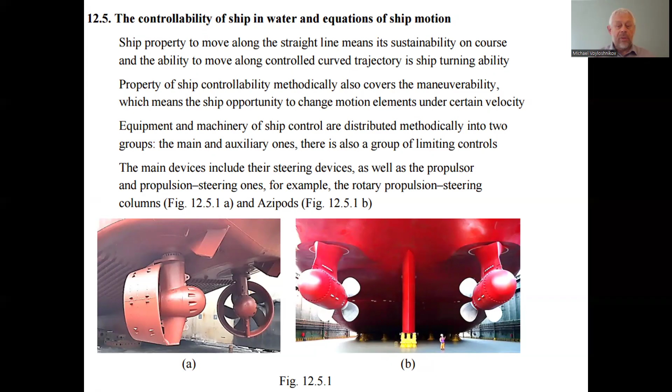When you consider the motion of ship on still water, we can describe this by a system of equations in three projections, considering the necessary assumptions. So we just consider the ship motion on the surface of the water. Three equations correspond to the degrees of the ship freedom on the surface of the ocean. The first equation corresponds to the total forces acting on ship projected on the longitudinal direction, the abscissa of the initial coordinate system associated with the ship.

We have a Cartesian coordinate system associated with the ship to do the calculus of ship controllability. We have here the characteristic of the ship inertia. In the first brackets, uppercase delta is the displacement of ship. Mu with the index 1,1 is the added mass of ship when it moves with acceleration along the abscissa axis.

The abscissa axis we usually indicate as x, ordinate y and applicate z, but for the coordinate system associated with the ship, we can indicate them by Greek lowercase letters like xi, eta, and chi, for example. Okay, return to the equation.

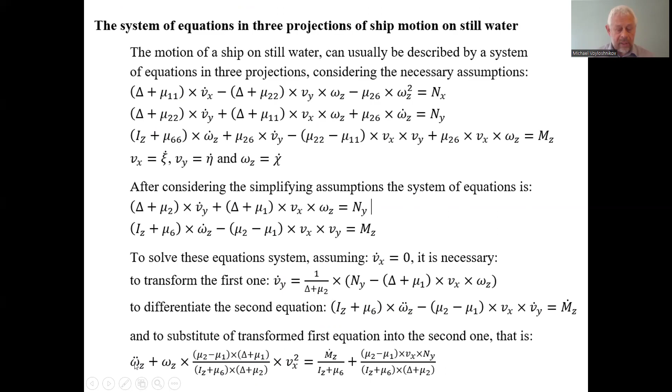I'm sorry. Here we have to consider the first derivative. The first derivative, exactly, yes. Sorry for the error in the description of this formula. The acceleration is the first derivative of the angular velocity. Oh, no. We have the second derivative as well. Yeah, excuse me, the second derivative. Yeah, this is correct. I just doubted a little bit whether the second derivative is correct. This is not angular acceleration. This is the second derivative of the angular velocity. Yes, and

between the angular velocity for continuous motion of the ship and angular acceleration, it is usual to consider the factor p from the solution of the characteristic equation. This characteristic is correctly found, yes, no errors. I just doubted a little bit and returned to consider. Am I right or not?

And besides, to find the characteristic root of the second order linear homogeneous differential equation, we will use the empiric formulas. Originally, we did it in article number 12.2 in more detail, but the moment of inertia of the ship rotation around the applicate axis, the self moment of the ship, not the added mass moment, has to be approximately equal to the moment of inertia of ship rotation around the ordinate axis, and we can use the empirical formula that depends on the general completeness, the completeness of the waterline area, the ship displacement and the squared length of the ship waterline.

Otherwise, just substitute. We got that the moment of inertia of ship rotation with acceleration around the applicate axis will be equal to 7,122,631 ton by square meter.

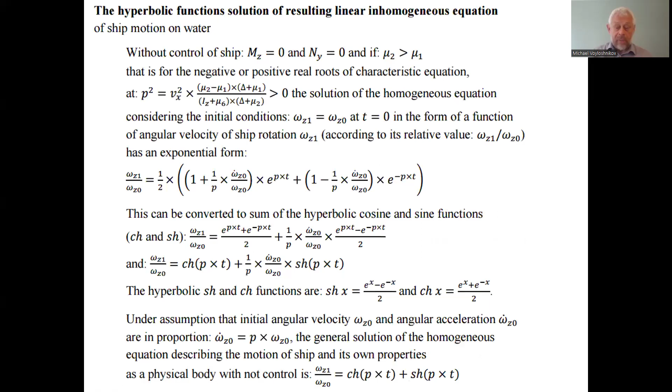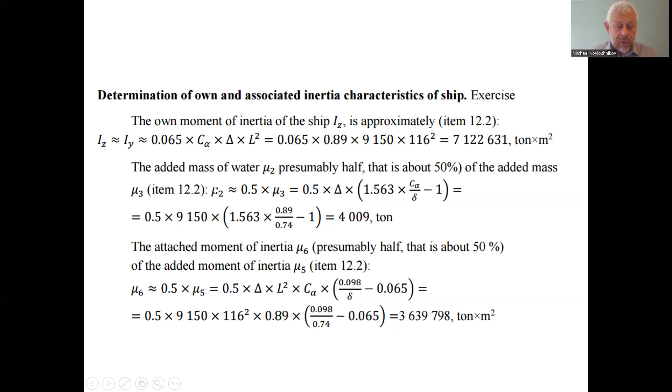And for the definite range, we assume the added mass mu2, which we got by the empirical formula of the water impact on ship inertia when it moves with acceleration along the ordinate axis, so transversely. For the transverse acceleration, the extra inertia of the ship, like the side impact of the water on the ship. And having mu2 and considering the range of variation of this fraction, we can find what mu1 has to be.

So mu1, the added water characteristic of the inertia of the ship when it moves with acceleration along the abscissa associated with the ship Cartesian coordinate system, inertial. So the system in which we consider the accelerations and the velocities, and with acceleration we consider the inertial systems moving with the ship. The Cartesian system associated with the ship moves with the ship with the same acceleration as the ship moves, but in this inertial coordinate system we consider the acceleration available in this system.

So the acceleration of the ship does not depend on whether it is the coordinate system associated with the ship or this fixed coordinate system within which the ship moves. All systems are inertial, so with the definition of the accelerations.

And having got the added mass when the ship moves along the transverse axis with acceleration, got by the empirical formula I did explain here for the ship when it assigns three particulars, and considering the range of the variation of this fraction, the proportion of two added masses of water, we got the range of the variation of the first one.

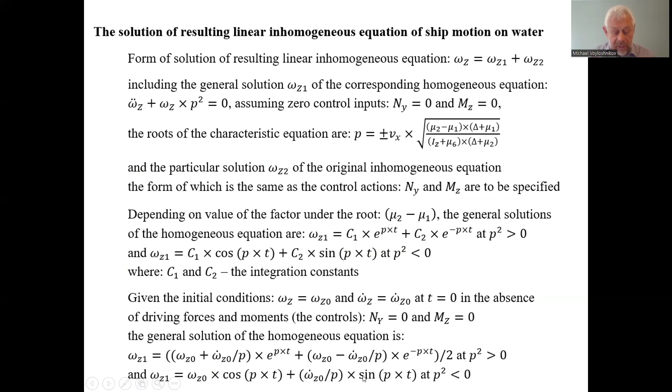It depends on, and this is the set of diagrams for imaginary roots of the differential homogeneous equation of second order. This we have for the proportion when mu1, the inertial characteristic from water onto ship, is proportional to mu2, the impact of water on the ship inertial characteristic moving transversely with acceleration. If this mu1 is less than mu2, the fraction has to be less than 1. And in this case, the root of the characteristic equation will be real, and decisions will be of the exponential type.

And if the added mass will be more, in the considered range from 1 to 1.7, more than the impact of the water on inertia when the ship accelerates along the ordinate axis. If mu1 is more than mu2, we will have the imaginary roots p of the characteristic equation, and we will have the trigonometric decision of the linear homogeneous second order equation of the ship motion on the surface with no controls.

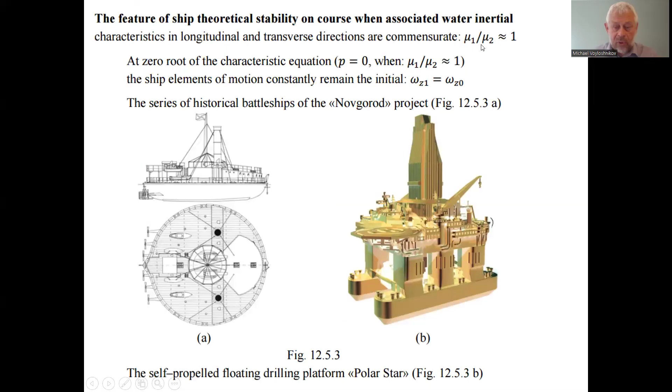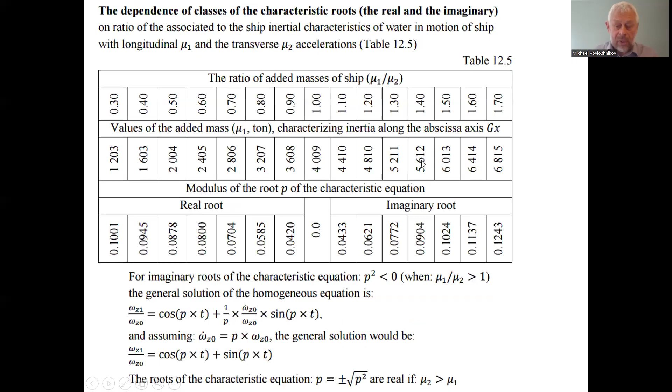When the added mass mu1 is more than or equal to mu2, the ship remains in self-oscillation moving in the same direction. For ships of usual shapes, when the ship length is much bigger than the breadth, the ship without control will lose the course and will move off the direction of the abscissa axis associated with the ship.

Consider the angle between the abscissa axis associated with the ship and the abscissa of the fixed Cartesian coordinate system. Originally they coincide, but if the ship changes course, an angle arises between the fixed coordinate system and the moving coordinate system associated with the ship. So it turns to either side, and after that it keeps moving in the same direction as originally for the initial conditions.

The possibility of this movement depends on the dissipation of energy: the motion of the ship attenuates, or perhaps it continues if the source of energy to keep the motion remains. In this case, turning transversely to the direction of motion, the ship will keep moving with self-oscillations. All this is without control, if we do not have a feedback system keeping the ship on a straight course.

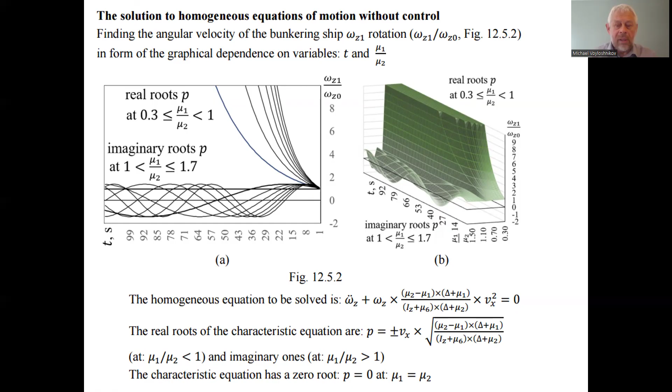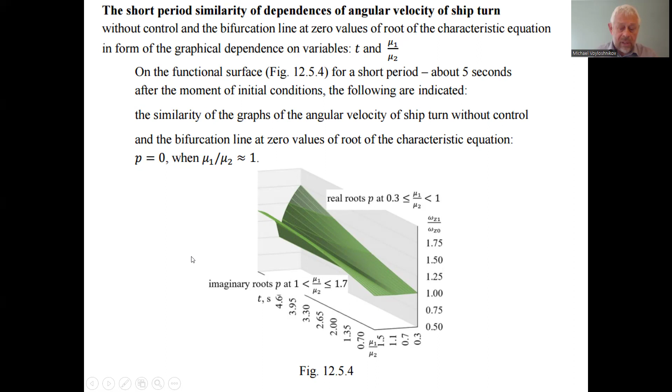So theoretically, the solutions of trigonometric type and of exponential type originally look the same, and the differences arise with time. Questions and comments. The seaworthy property of ship controllability covers its straight-line motion stability and its turning ability under the influence of the control system, and maneuverability, not related to the control system, is the ability of the physical ship to perform maneuvers at a certain velocity.

Ship controllability is one of the usually considered five ship seaworthiness properties, along with buoyancy, stability, the ship propulsion performance, and the ship unsinkability, if we consider this property of a partially damaged ship to retain the properties of buoyancy and stability.

So we have, along with the four indicated, the fifth seaworthiness property. Ship controllability is generally not only the performance of the ship with a feedback control system and with controls, but of the ship itself. The ship itself has definite properties due to its controllability.

12.5.2: elements of ship shape having an opposite effect on stability on course and on ship turning ability, when, for example, the ship motion stability on course improve by increasing the ratio of ship length to breadth, or installing fins in front of the rudders, at the same time they can proportionally worsen the ship turning ability.

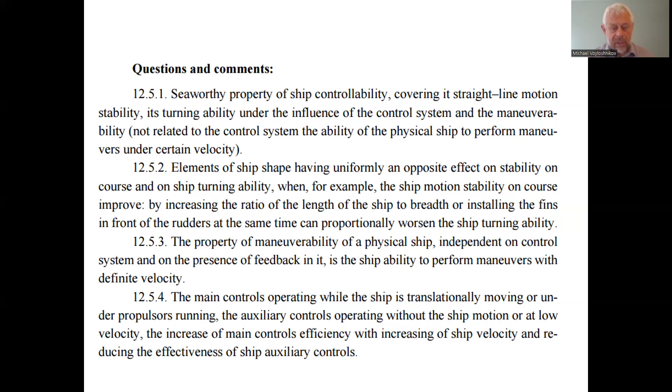12.5.5: types of steering devices of ships: rudders, multi-blade steering complexes, rotary steering devices, reversible steering devices, water jets, etc. This is just a question for an expert overview of the technical gear and the technology of ship control operation.

Types of propulsion and steering devices: the propeller and rotary nozzle in combination with the stabilizer, the rotary steering column, the azipod, wing propulsion, etc. Some steering devices combine the functions of propulsion and of ship control. This is the example indicated in question 12.5.6.

12.5.7, a system of equations of three projections describing the plane motion of ship on the surface in still water, integrating the equations in the coordinate system associated with ship when determining the velocities, translational, angular, and the accelerations of ship, and finding the translational angular displacements in fixed coordinate system.

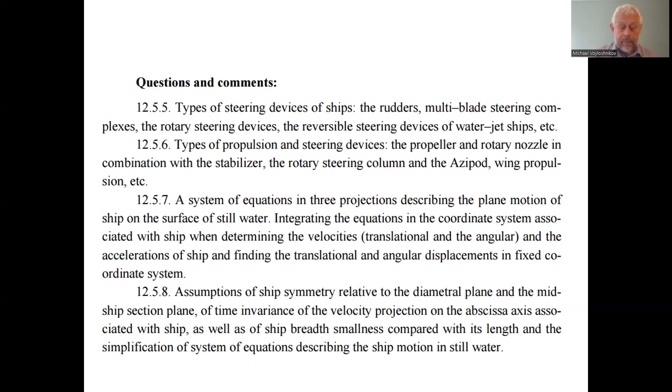12.5.9, transformation of system of two first-order linear equations into one second-order linear equation, which solution serves the solution of equation system describing the ship motion in still water. After the simplified assumptions, we first have to do the transformation with the two got isolated equations. The first transformation is that we have to differentiate the first equation, and we'll find the first derivative of the translational velocity of ship, dependent on the elements of the ship motion with no controls.

And no, we do not have the derivative from the first equation. We will just derive the velocity derivative from the first equation. And next we have to do the differentiation of the second equation and substitute the first derivative of the velocity got from the first equation into the differentiated second equation of these two isolated motions considered in the one system of equations. After that, we will have the inhomogeneous second order differential equation relative to the angular velocity of the ship rotation around the applicate axis, the plane rotation of ship on the surface in the water.

This could be homogeneous or inhomogeneous, depending on what is the right side of the equations. The right sides are caused by the driving forces or driving moments.

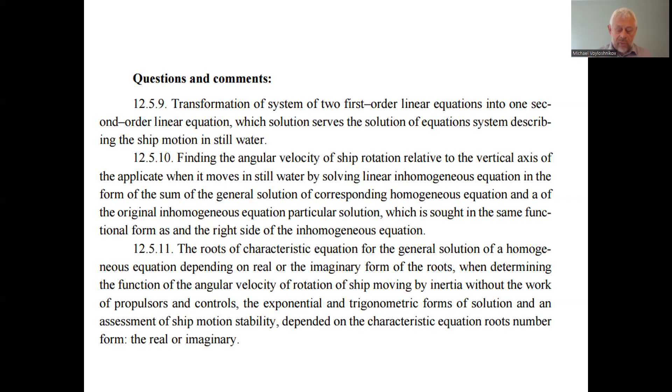12.5.12: An exponential form of general solution of the homogeneous equation when the root of the characteristic equation is a real number, when the added mass during the ship motion in water with acceleration along the abscissa is less than the added mass of water when moving with acceleration along the ordinate axis; the unstable motion of the ship, and its tendency to turn across the motion direction and then move towards the side, performing self-oscillation.

That's what we are talking about, in dependence on the shape of the submerged part of the ship hull. Yeah, usual ships do turn across the motion direction and then move towards the side, performing self-oscillation. This is characteristic. To exclude this possibility and to keep the straight course, the usual ship is required to use the controls and the autopilot or feedback system of the controls to keep the direct course.

And this characteristic for the ship, the tendency to turn across the motion direction and then move towards the side, performing self-oscillations, is the property of the usual ship shape.

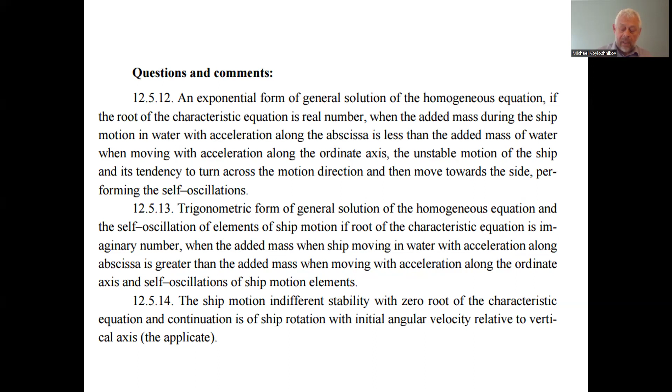This is for the reason that the ship added masses in the water in the motion with acceleration in the longitudinal direction are less than the added masses when it moves with acceleration in the transverse direction. After solving the equation, we can have the indifferent stability of the ship, and we will have the zero root of the characteristic equation.

12.5.15. The vicinity of bifurcation, a line corresponding to zero values of the root of the characteristic equation, which delimits the prerequisites when the added mass during the ship motion in water with acceleration along the ordinate axis is less than the added mass during acceleration along the abscissa axis, and the root of the characteristic equation is an imaginary number, and vice versa, when the added mass is greater along the ordinate axis, and the root is a real number.

It is a theoretical concept that when we consider a very short time period after the initial conditions, the shape of the diagram of the ship motion with imaginary roots of the characteristic equation could be about the same as for the ship with real number roots, and these roots depend on the correlation of ship inertia properties in the water, when the ship moves with acceleration along the longitudinal abscissa axis and along the transverse ordinate axis.